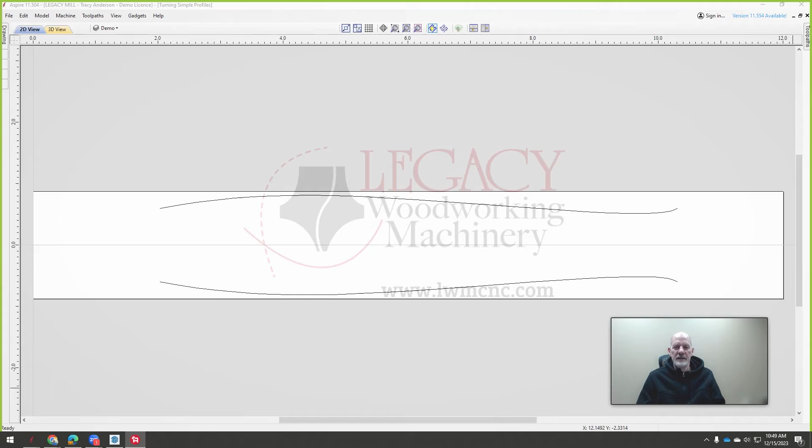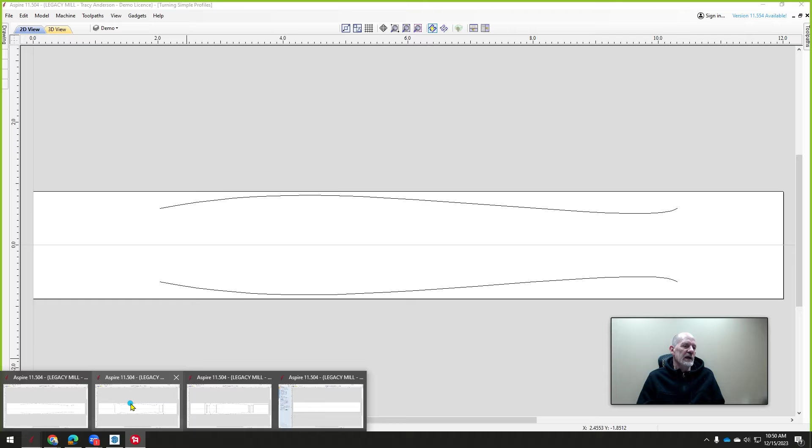We're going to be teaching how to use the 4-axis turning center and Legacy's new conversational CAM to simplify the turning process. We're going to do 3 different approaches in the upcoming videos. The first one will be a very simple design like you see here. The second one will have a little bit more detail, and we'll figure out how to handle those details. The third one will be even more detailed, and we'll show how to combine router bits and our copy lathe type of tool path together to do everything. So we're going to start off with just the first one.

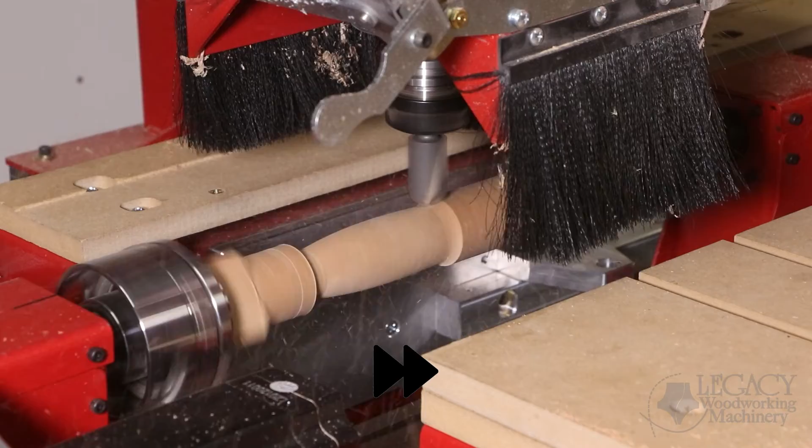I'll start off with just a blank sheet here, and we'll go ahead and show you how to program this, how easy it is. Normally you would need to model this in 3D and then create your toolpath in order to turn it, and there are several techniques for doing this. But if you have VCarve Pro and you're unable to model something, this makes it very, very simple.

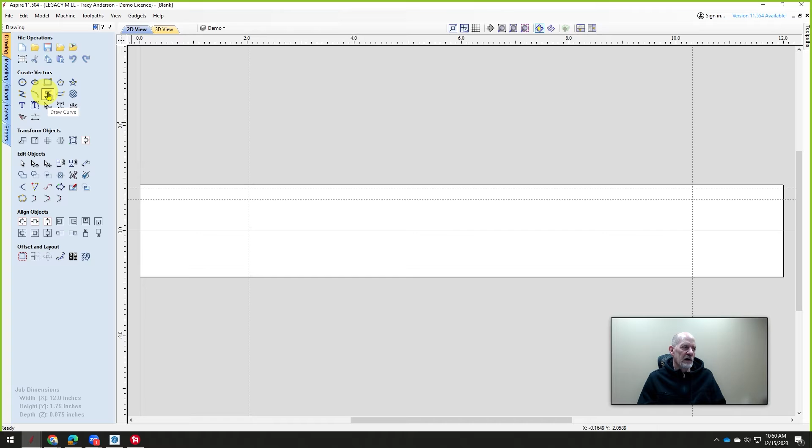For example, I'm going to turn on some of the guides. I just dragged some guides out here, didn't put them in any particular location, but it gives me an idea of what I want to form here. Then I'm going to use a tool to draw a curve. This is actually what's called a spline. I'll start here and make it flare up about that far, and then we'll end up down here at this end, like so. That is my vector that we're going to use.

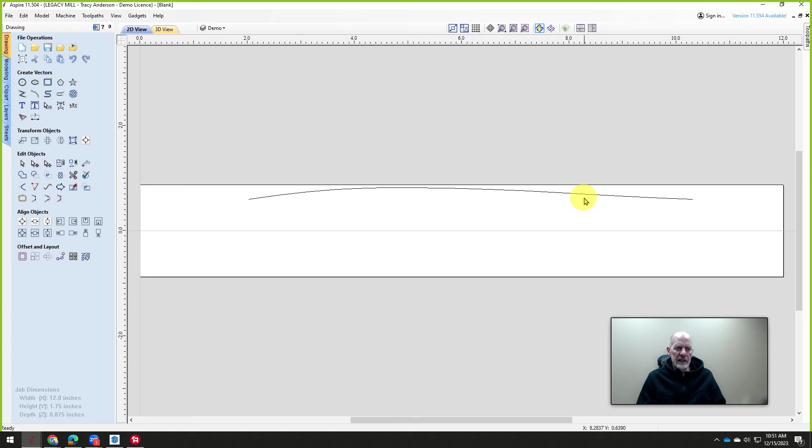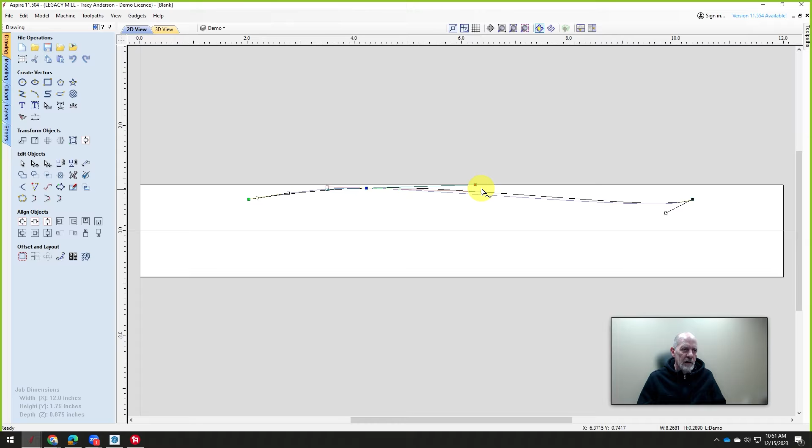I'm going to turn the guides back off again. I don't quite like the shape of it, so I'm going to put it into node editing mode. Once I do that, I can start modifying this. This is a Bezier curve, so I can modify it a little bit. I kind of like something like that, maybe. Maybe we'll bring this up a little bit. Zoom in a little bit, get me a good shot.

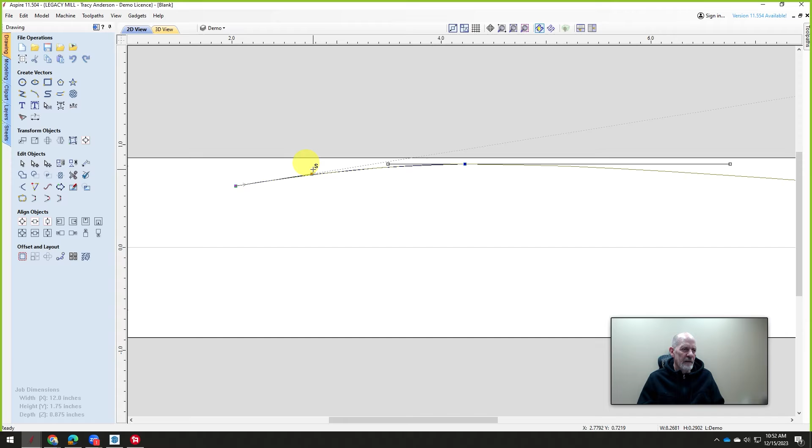Okay, take it out of node editing. So, I don't even like that. Let's change that a little bit more. I'm going to bring this up just a little bit. Okay, yeah, that looks good.

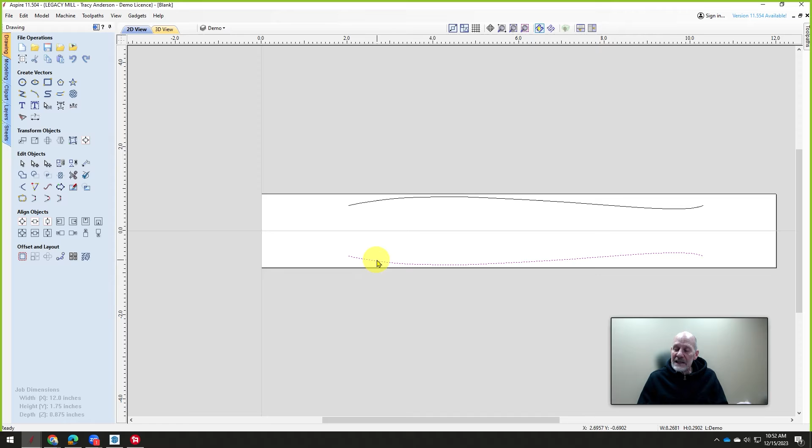Once you have a simple vector like this, if you want to see what it's going to look like completely in a 2D model, we can simply mirror this, and you can see it's going to turn around like a copy lathe following this. Technically, we don't need this at all. All we need is this one vector, but this gives me an idea of what the total piece is going to look like. Now we're going to use a router bit here to copy this, and it has to be able to follow tangent on all the profiles from the top. Therefore, we're going to use a router bit that's really a core box or a round nose.

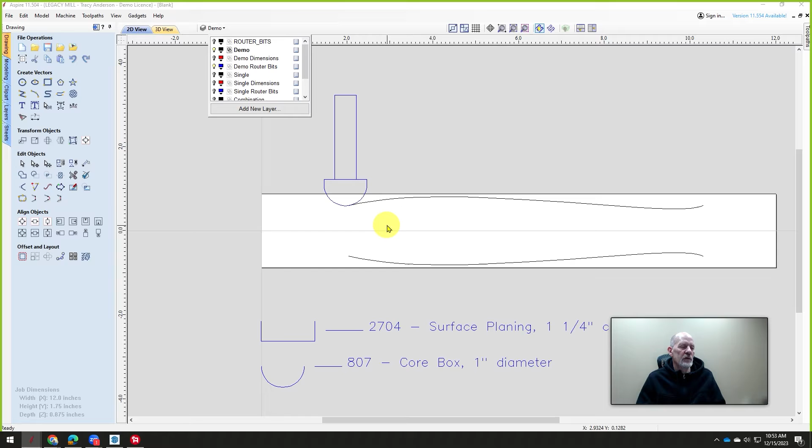We'll technically use 2 router bits in this particular project. One will be just to turn this whole blank round real quickly, and then the second one would be to do the copy lathe tool path. We call it the G200 or copy lathe tool path. The only thing we would need on here is some dimensions. I don't need any dimensions for this cut, the diameters, positions, or anything. That's built right into the drawing.

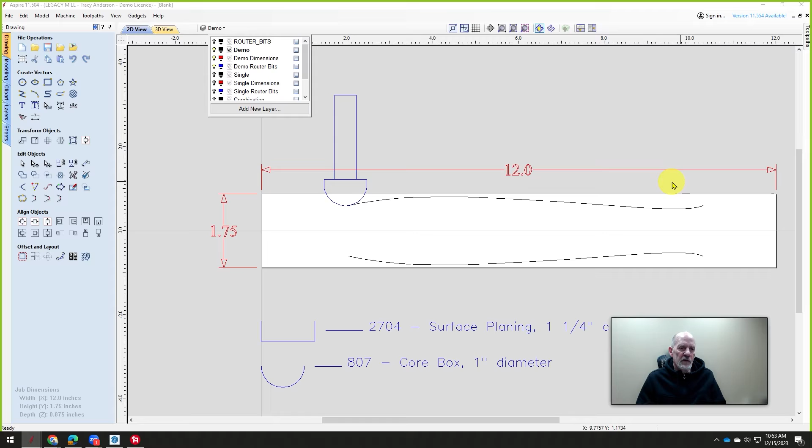All I need to know is what size blank. I'm going to make my blank a little bit larger, and I'll turn it down to 1.75, and we'll make it 12 inches long. Once you have this information, all you have to do is select that vector, and then we'll switch over to our toolpath side, and we're going to do a 2D profile toolpath. We're just going to follow that vector, that line.

We can decide the cut depth in here. It really doesn't matter at all, the cut depth, because we're not going to do it in this program. We're not using the CAM program here. We're going to do that in Conversational CAM Pro. So it's going to convert this 2D to the turning.

Now what we'll do is we'll give it a half inch, that's just fine, that's okay. Then we're going to select a bit. Legacy has created a full library of tools. You can see here it's the Legacy tools. I replaced the ones that came in Aspire with this set we created because we have all kinds of designs and profiles. There's a section called Vector Turning, for the G200 or copy lathe type of toolpath. What we'll do is come in here and choose a diameter that's going to be used for this turning.

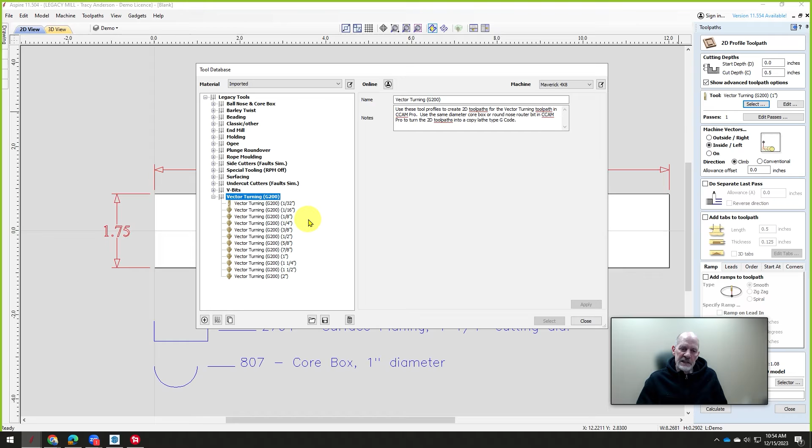It's not the shape of the bit, it's only the diameter. And we're going to use this core box right down here - it's 1 inch in diameter. So I'm going to use a 1 inch vector turning bit. It actually looks flat like this, but in reality, you'll see how this converts into a turning process.

Okay, so we've got that. Now what we're going to do, I'll just move my face over a little bit, and we'll cut the depth, make sure it's 1 pass. And we're going to cut on the left. You can see this green node right here is the starting point, and so we're on the left side of that line. If you stood here and looked down the line, that's the left. And you can see how this router bit is going to be tangent and just follow that along.

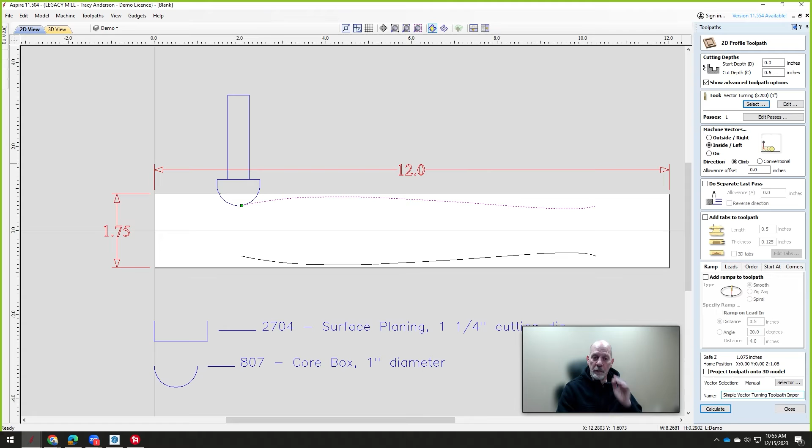And that'll work, that's all we need to do. And we can call this anything we want. I'm going to call this the vector - a simple vector turning toolpath. And I'm going to call it 'for import' because we're going to import that into Conversational CAM Pro.

Okay, at this point, now we can simply preview this one to see what it's going to look like. And you notice it's a flat bit - we don't care about that. Conversational CAM Pro is going to turn this automatically into a copy lathe type of toolpath. It's going to turn it around perfectly, and it'll be using a core box, not that vector turning router bit. We just use that to model.

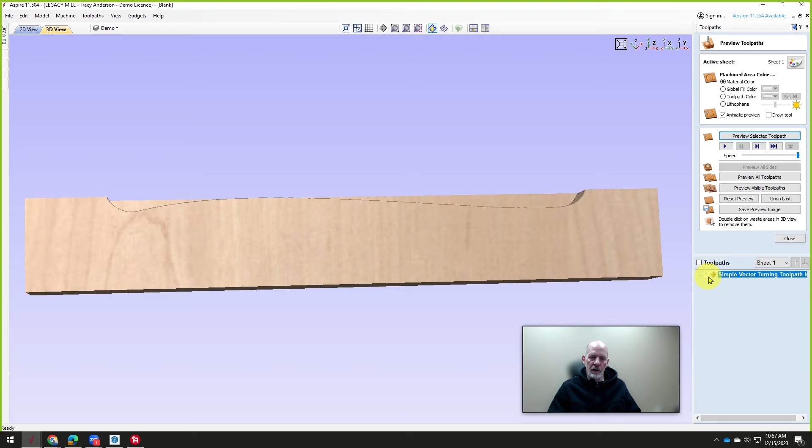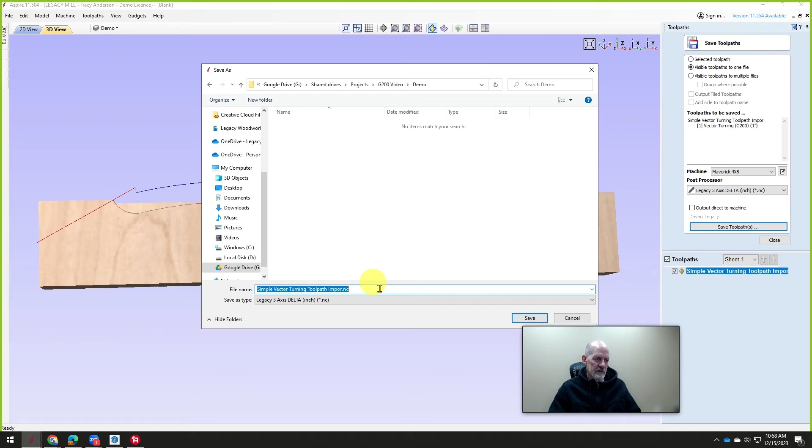So once we have this done, we'll go ahead and check that, and we're going to save this toolpath out. I'm calling it the simple vector turning toolpath. Let me open this up a little bit so you can see it. And it's for import - we're going to use it to import into the file. We'll go ahead and save this, and put it here into my demo folder. Simple vector turning toolpath - oh, I called it 'impor' not 'import', let's add a T to that. All right, save, we're done.

So all you got to do is draw a simple vector, create a simple toolpath, a 2D toolpath using that tool, the diameter that you want. At this point, we're going to open up Conversational CAM Pro.

All right, now we'll go through this real quickly. If you're not familiar with Conversational CAM Pro, it's a project-based unit. So we're going to go into projects, and we're going to create a new project, and I'm going to call this the copy lathe - the G200 copy lathe demo.

All right, now when you create a project, you can use the horizontal table like a standard CNC. You can use Legacy's vertical table for doing all your joinery and things like that. Or you can simply use the turning center, or a combination of all of them or any of those. We're only going to use the turning center here, so we'll go ahead and click that.

And this is the project name. Now, once we have that, you'll notice it lists over here that we only have one work center - it's the turning work center. If I did go in here and edited this and said, oh, we're using the horizontal table as well, you would see them both here. But in this case, we don't.

So let's go in and edit, and I'm going to remove the horizontal. We're only going to use the turning center. Click Save, and select that. You notice now there's only a turning center.

So when I click this, you can list the parts that you're going to be using in here. So we'll manage parts, and I'm going to click New, and we're going to call this a simple turning demo, G200 demo.

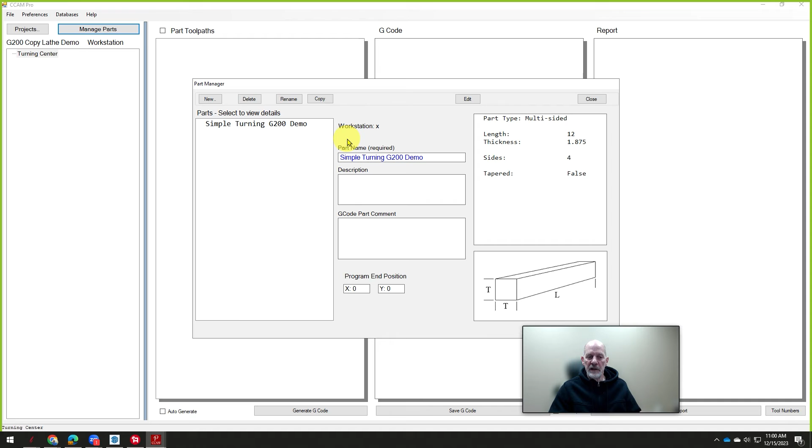And if you want to, you can add descriptions or comments or whatever, but we're just going to put this in here, and that's fine. Now at this point, I could actually create one for the other demonstrations as well. We can create as many parts as we want in here, but I'm just going to use this one.

That'll be fine. So now you can see in the turning workstation, we have a part called the Simple Turning G200 Demo. If you click on this, then it changes to Manage Your Toolpaths. And what I'm going to do is, first of all, we're going to turn it round. Okay, and then after that, I click Add, it just puts it in the list.

After that, we're going to import. Now this is the key right here - we're going to import the vector turning. And that's called the toolpath called the vector turning. And we're going to add that.

So I've got two different toolpaths we're going to create here. I can list them all, either one at a time as I program them, or I can list them all in here and then come back and program. If they haven't been programmed or set up, then they're being read here. So we'll just click on the round.

The first thing we'll do is choose a cutter, and I'm going to use a surface planing bit. Use the 1¼ and we'll select that. Last bit number 1 is fine. Has not been turned round.

We're going to start at 0. We're going to turn it to 1.75 - that's the diameter we had on our drawing. We're going to end it at 12.

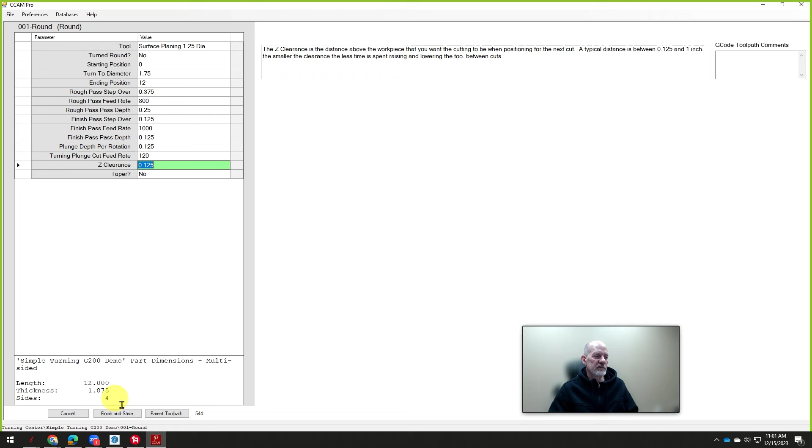You can save these at different values if you want, but these defaults will all work. I think I'm going to speed this one up. This is just the cut rate, feed rate while we're cutting it. I'm going to speed this up considerably. They're very conservative numbers and they'll work just fine, but I'm going to speed it up. Okay, so that's our round.

It's programmed, and if you wanted to see the code, you could generate the G code right here. That'll turn that part round to 1 3/4.

And then we're going to go click on the vector turning because it's not programmed yet. Here it says select the G code file. You'll notice over here it always gives you some help with what it's asking for in this field. Select the G code from Vectric, which we created in Vectric.

Let's go find that file if I can. Let's see, I put it in my projects and... G200 in the demo. There it is, the simple vector turning toolpath, and it's for importing. So that's why I put import on there.

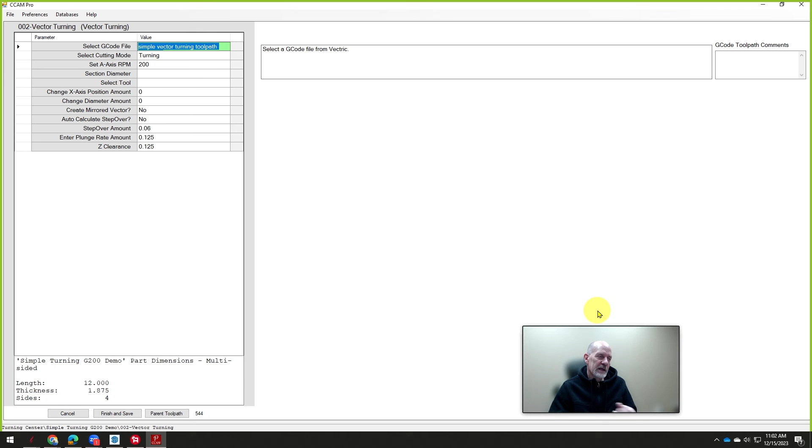So we're importing the G code that would normally cut a 2D shape on a flat table, but we're going to convert this to a copy lathe. So the cutting mode is turning, and the RPM is 200 RPM.

That's standard, and I would go ahead and use that all the time. That's pretty basic. The section diameter is 1.75 because we turned it down from 1.875 to 1.75.

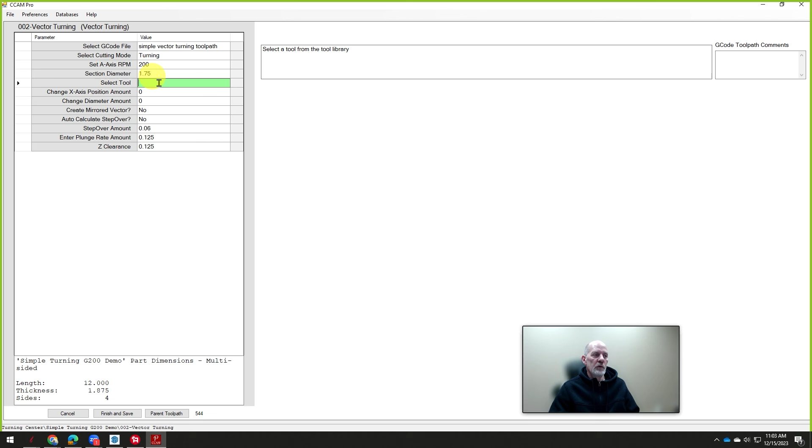And now we're going to select the tool. You remember we used a 1-inch diameter. If I go back in and look at this real quickly, I think it's this one here. Yeah, we used a 1-inch diameter core box bit, and the 2704 was what we used to turn it round.

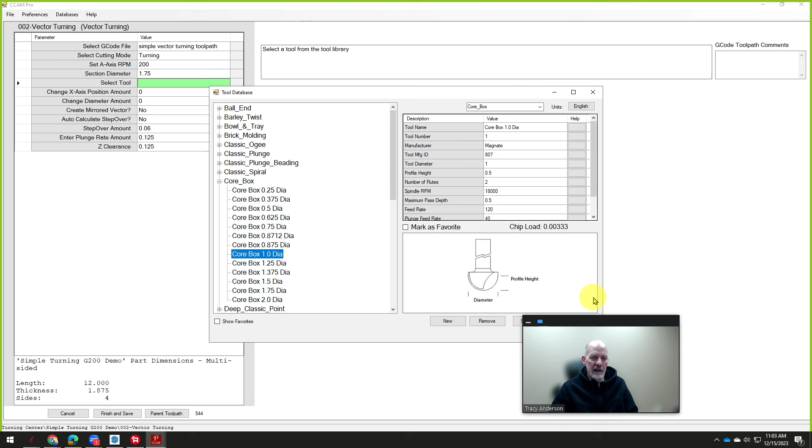Okay, that's good. So here we're going to go to the core box, and I'm going to choose a 1-inch diameter, the same size, and we'll go ahead and select that cutter. We can use the default, which is in the database, is 1. The last time we used it was 2, or I could just give it a different number here.

I'm just going to say, let's use number 2. It's what I used last time. All right, so all my tools are set up in my tool holders in my machine, so that's why its default is number 2, but you can change those at any time.

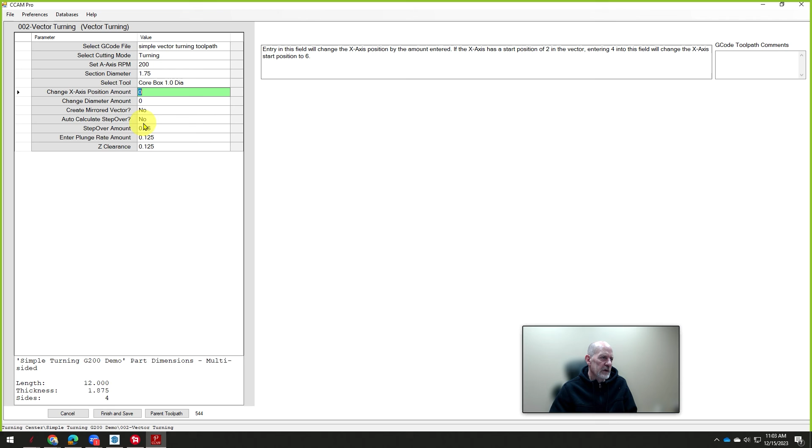Okay, we're not going to change the X. We're not going to create a mirror. We are going to auto-calculate. If we say yes, auto-calculate the step over, it will do a step over that makes a very smooth, beautiful turn. That's all you got to do.

Click Finish and Save. This tells you where it's going to start at the X and where it's going to end at the X, and the diameters, the maximum and minimum diameters here.

So we click OK. Now we've got both of these checked, and if I generate this code, then of course your first part will be turning it round, and the second part will be cutting that shape as a lathe.

So it's going to turn it like that without modeling anything at all.

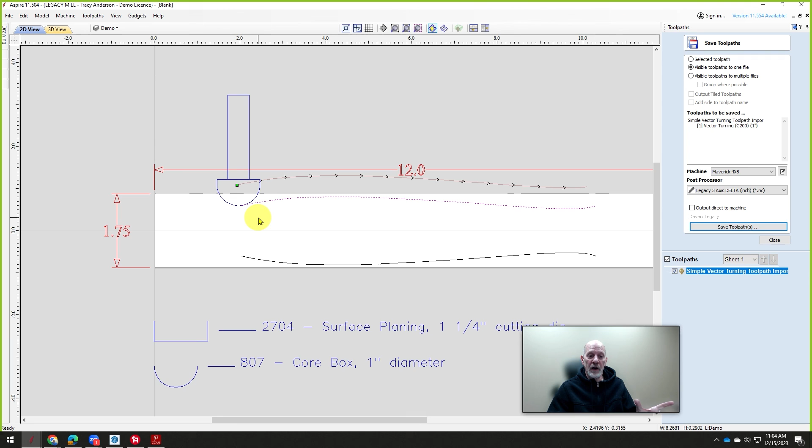All you have to do now at this point is save out this G code, and we'll put it into the demo, and I'm going to call this the simple...

G200 turning. Okay, and I'm going to put G code on it, so if I see this file, I know exactly what it is. It's definitely G code.

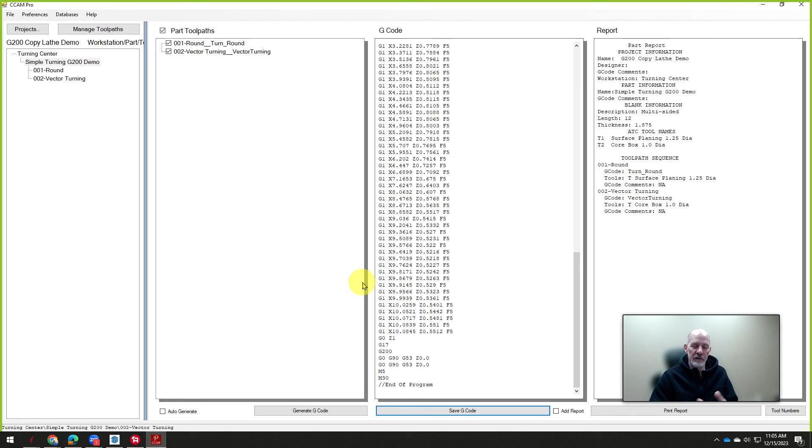Okay, that's the file we're going to take out and put on the machine and turn. Okay, you see how simple that is and how quick it is to convert that to turning like a copy lathe and just turn that part.

In upcoming videos, again, we're going to take this to the next step. We're going to show how to handle details like this, sharp corners and things like that.

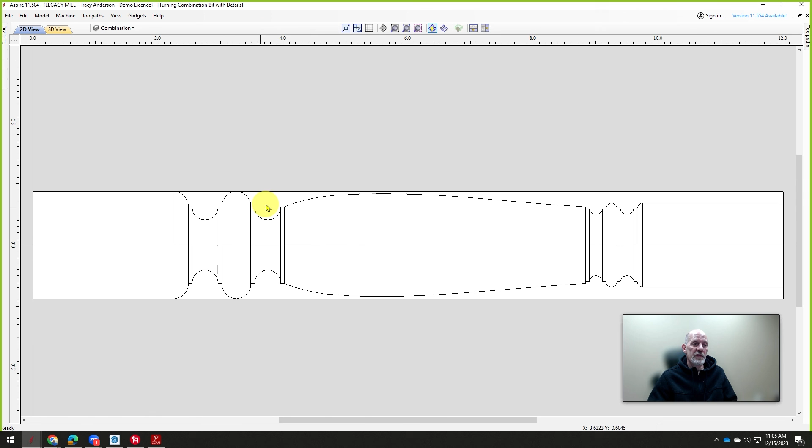We're also going to show you how to combine router bit profiles with these contour shapes, all done in Conversational CAM Pro. Makes it very easy and very powerful. So look forward to the next videos, and we'll see you next time.